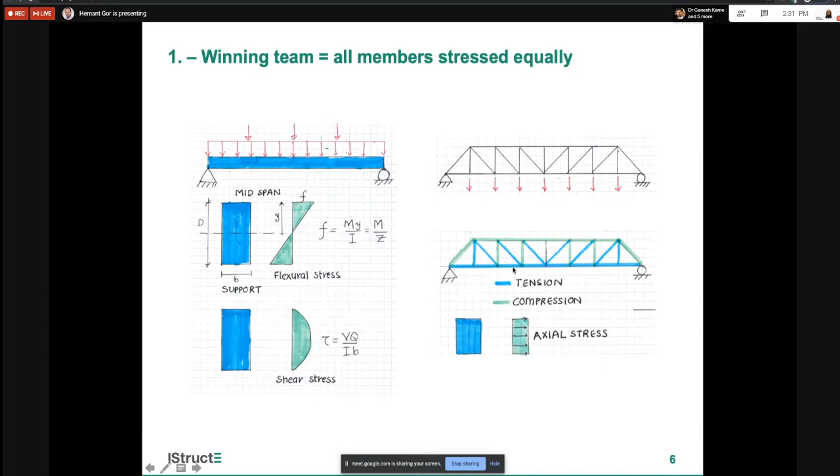Same way, engineers have developed the truss tube system for tall buildings. If you want to build a 30, 40 story building, we go for a shear wall, coupled shear wall, core wall. But if you want to reach a bigger height, we go for a truss tube, where the forces are transferred through axial compression and tension.

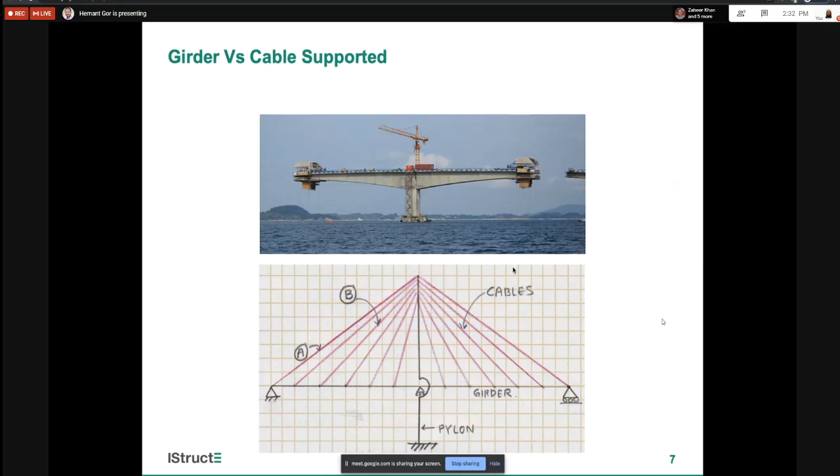So this is the first principle. When you want to make a winning team, all members should be stressed equally. So if your dreams are big, you make a team in which all the members take stress equally. So now we will move to the second principle. Optimized form is where you do minimum work.

In this example, I want to carry a load W to the support. I have a span L, and this load I want to transfer. I have created a truss. The members in blue color are in tension, and the members in green color are under compression. I have a mid-span W load, which I want to carry to the support. These two members, which I have highlighted, don't take any force. Sometimes in a truss, we have zero force members.

During the 17th century, early days of engineering, we didn't have branches like civil and mechanical. They were philosophers, Newton, Maxwell. So they wrote certain philosophy. During that time, Maxwell wrote a theory where he said, when you have a truss, you do the sum of force in a tension member into tension member length. So here we have 5 members under tension and 5 members under compression. So you bring together tension members and compression members, you do the summation, and if that sum, which we call work done, comes less, that structure is the most economical.

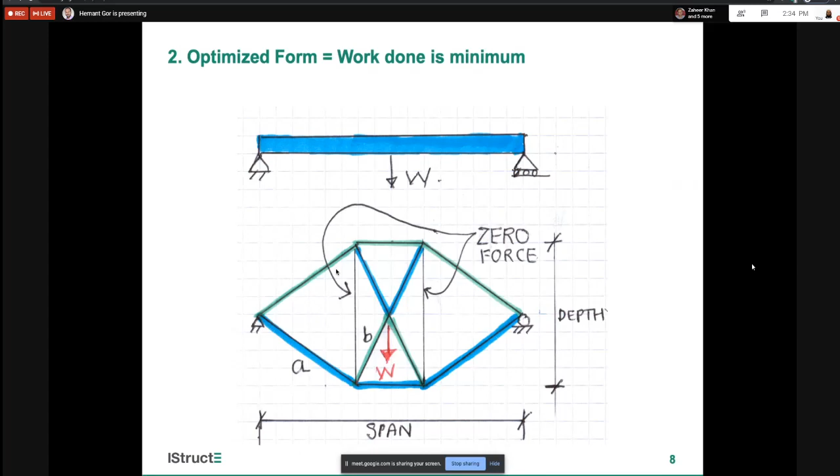I wanted to verify. As civil engineers, I believe we should have 3 Cs: curiosity, commitment, and continuous lifelong learning. So I took this problem. I kept my span fixed and the depth of the truss fixed. The only thing I could change was the ratio of these two members in blue and green color, which is A over B. I did a few iterations to find out which ratio will do minimum work.

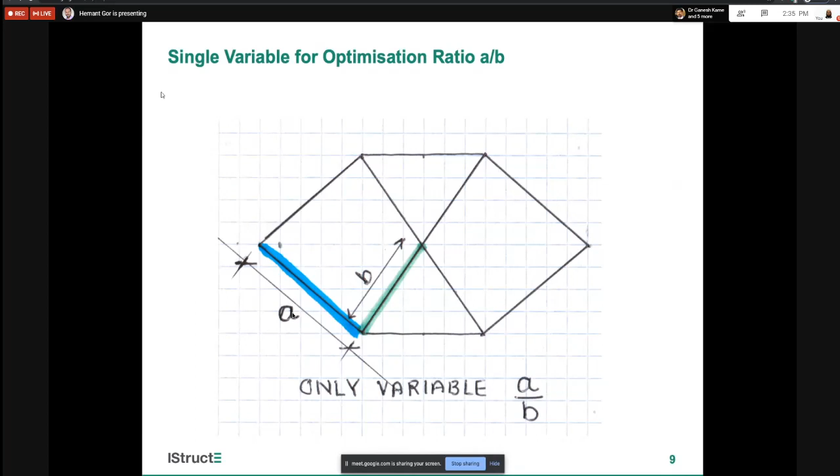This is the second principle. When we create a structure, if it does minimum work, it is the most economical form. So I did analysis in an analysis tool. This is my problem: a span of 4 meters, a lever arm, which is the depth, of 2 meters. 5 members went in compression, 5 members went under tension. And as Maxwell said, if I have a force in member 2, I will multiply it by member 2 length, force into length.

So the members which are in tension, I will bring them together: 2, 4, 11, 7, and 9. I will do the sum. Same way, compression member 1 force into member 1 length, member 6 force into member 6 length. So we have two sums. That structure is amazing. It is optimum.

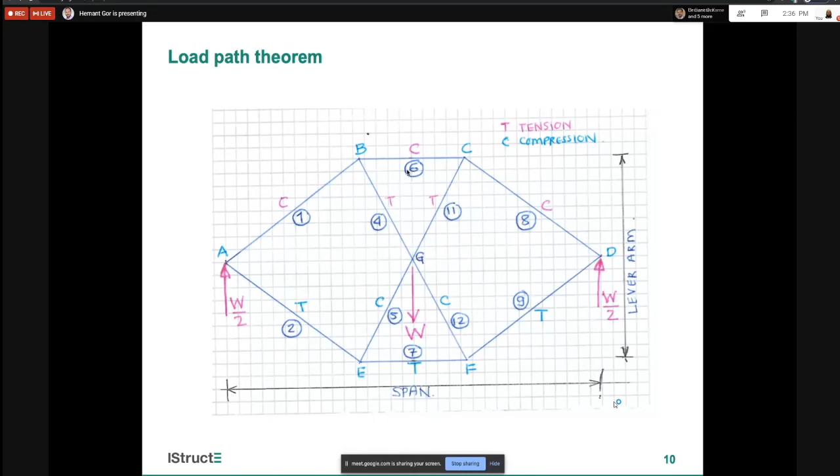So let me share with you the outcome of this research problem. I took 3 trial ratios. First was A over B as 1.543. Second, 1.618. Third, 1.752. And I started noting down the forces in the members and lengths. I applied a 100 kilonewton point load at the center.

Let me share with you the first analysis outcome. So the first analysis we did with the ratio A over B of 1.543. Member 1 length was 1.761. Force in that member, which was under compression, was 44 kilonewtons. And when I multiply 44 with 1.761, the number which comes is 77.545.

I did the same exercise for the remaining 4 members in compression. I found their sum. The sum came to 275.202. The same thing I will do with members in tension. We had 5 members in compression, 5 members in tension. So we did this exercise with the members which were under tension: 2, 7, 4, 11, 9. Their length and forces in them.

So now here, since in some software they show tension as negative and compression as positive, the sign is not important now, because we have accumulated all the tension members together and compression members together. So now we found the force into length sum, again 275.

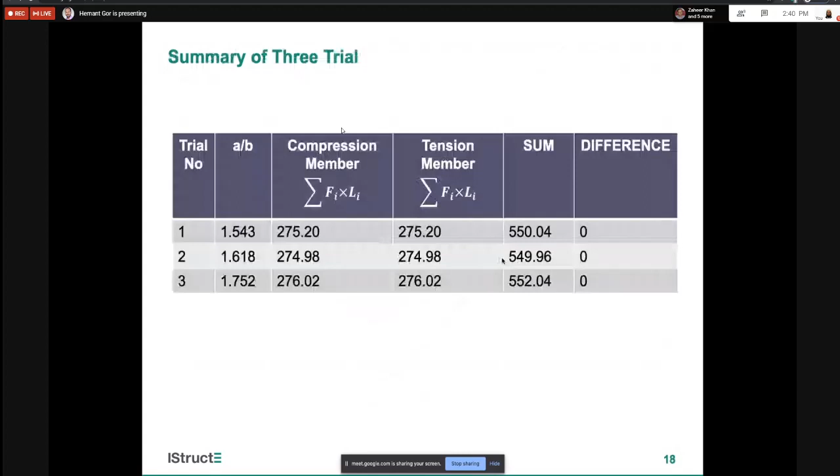We learned in our first year computer science course. The computer teacher told us to write an algorithm which gives us a Fibonacci series, which is 1, 1, 2, 3, 2 plus 3 is 5, 5 plus 3 is 8. So when you continue this Fibonacci series, the ratio of 2 adjacent numbers, bigger number over smaller number, comes to 1.618, 1.618.

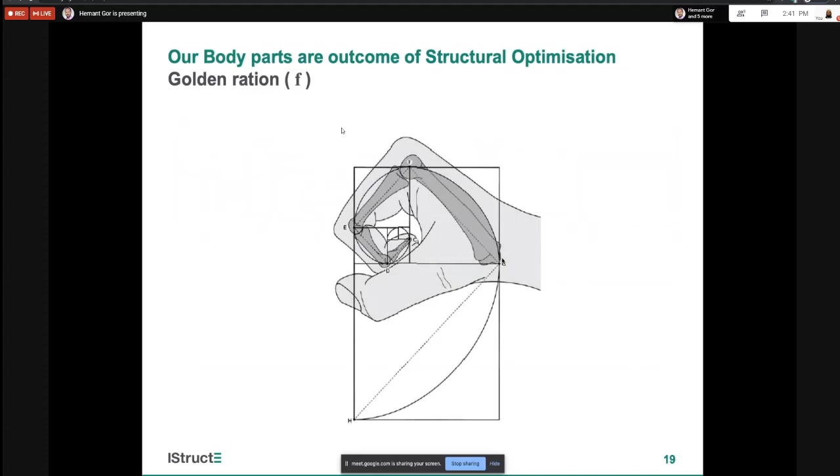And the structural engineer who created our body: when you look at your fingers and try to bend them in this shape, the ratio of this length over this comes to 1.618. This over this, 1.618. So this means the one who created our body was a true structural engineer. He wanted us to do minimum work.

Now you will be curious to know how we can apply this knowledge in our structural engineering. Bill Baker, who designed the tallest building, utilized this angle for his bracing, because when you create a truss with a bracing angle which gives the golden ratio, it will do minimum work. Many structural engineers, I want to tell you that you always can connect mathematics with structural engineering. If you create a structure which is beautiful and elegant, it will be economical, it will be optimum.

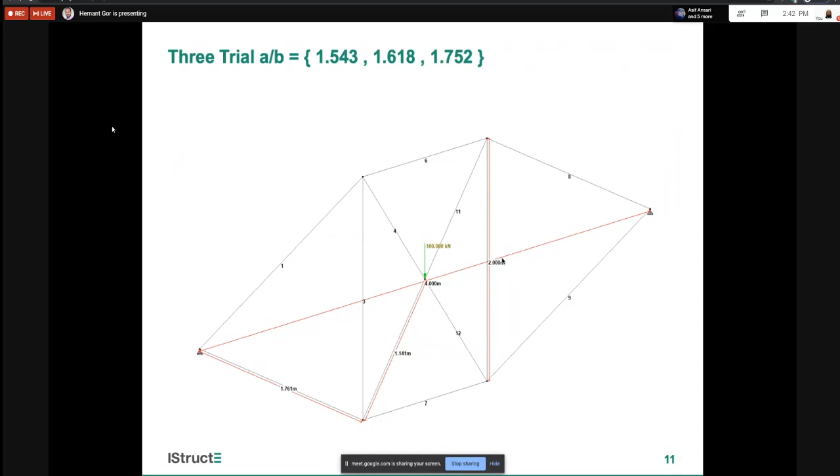So when you come to industry tomorrow, connect your learning at university. What we learn at college is 2 to 5%. I remember when we design a foundation, we assume the self weight of the foundation is 5 to 10%. So what we learn at university is 5%, 2%, but it is the foundation which will make us a true engineer. So keep whatever we learn at university, different subjects; it will be a foundation for our future.

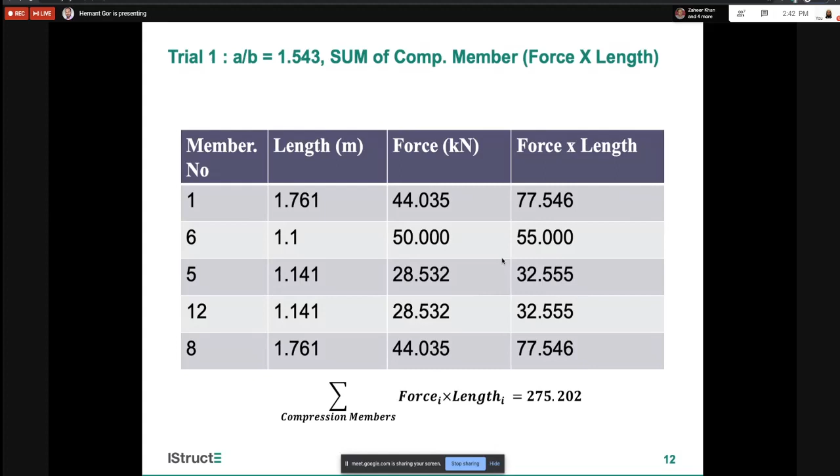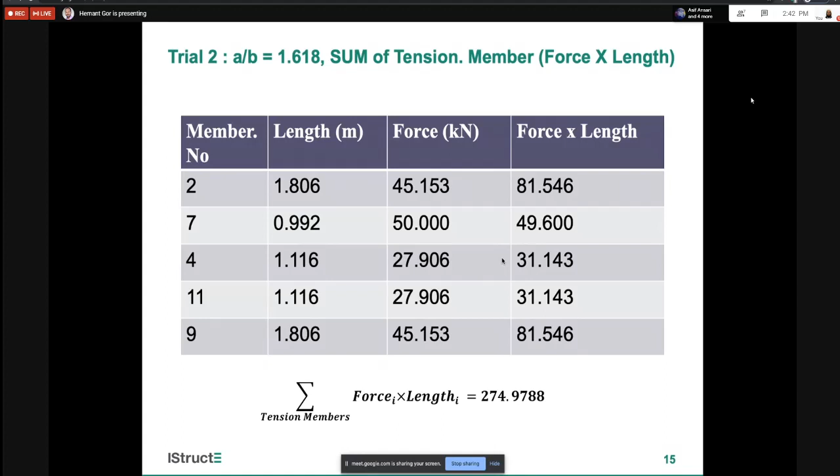And the structural engineer who created our body, the complete body parts, if you see, has 1.618 in our body. And as structural engineers, we can connect the significance of 1.618 with work done. Now, I will present a slide which will show you how Maxwell developed this theory; fourth year students will remember this equation.

Work done in a truss is F squared L over 2AE, where F is the force in a member, L the length of the member, A the cross-section area, and E Young's modulus. If we rearrange, we make F over A times F. So F over A is the stress in the member. So if you stress all the members to the same level, stress divided by E, a material property, becomes a constant. So we can find F into length, and that will be constant. So this can be proved through our learning of work done in a truss. So that was my second principle of the shortest load path theorem.

So when you get an assignment and want to come up with the optimum solution for a truss, you make alternative schemes. Now you will be asking me, here you didn't consider slenderness ratio or net area, because when we design a truss, compression capacity is governed by the slenderness ratio, L over R, and tension by net area. So first, this gives you the form of a structure which will be most economical, which doesn't require area or modulus of elasticity at the beginning.

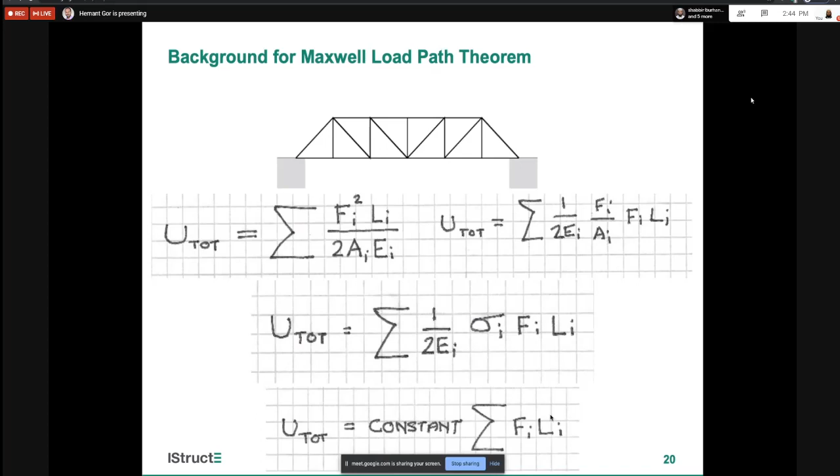Now I will jump into the third stage. Design projects have 3 stages. The first stage is concept design, which we call CD.

Second, preliminary design, where the objective is to size beam, column, foundation, and lateral load resisting system, and develop drawings which we can float for a tender, and contractors can come forward for their bid. So the preliminary design stage is where you broadly finalize your bill of quantities, material, MTO.

Once the contract is awarded, the contractor needs detailed engineering drawings through which he can perform execution, to build the complete structure. That stage we call detailed design. In oil and gas industry, the preliminary design is called front end engineering design, FEED. So these are the 3 stages for design of a project.

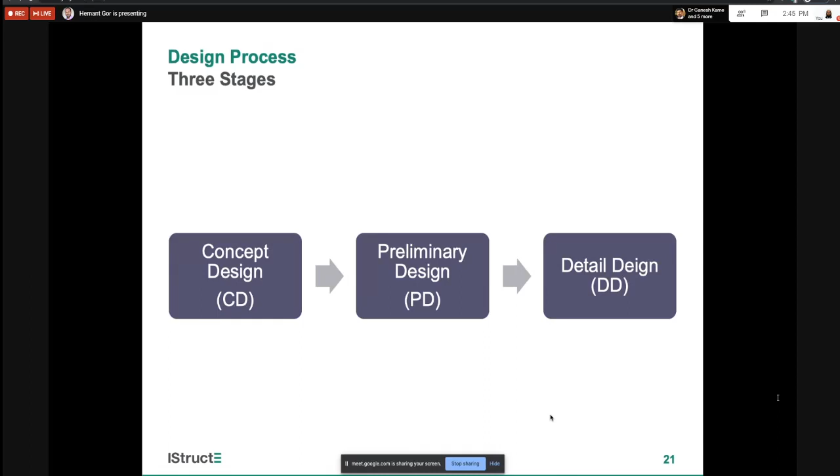The design process flow chart explains this. The first step is to understand the problem. Like we want to build a bridge for a given span, what are the site constraints? If you want to create an industrial shed, what is the height, span? Then we finalize the structural form - do we want to go ahead with a truss or a cable supported structure, different structural forms.

Then the second step is initial sizing of elements - beam, column, bracing members. Once we have geometry and initial sizes of a member, we put this information in a 2D or 3D simulation software, apply load, boundary conditions and constraints. Once we receive computer simulation results, should we trust whatever the computer gives?

No, we should verify our results with hand calculation. We should check does action and reaction match. If you have applied a gravity load, then summation of horizontal forces should come to 0. This type of check gives us confidence that we have equilibrium, which we call Newton's third law. We check the deflected shape, and by simple hand calculation we can calculate bending moment, shear, tension or compression forces in a member.

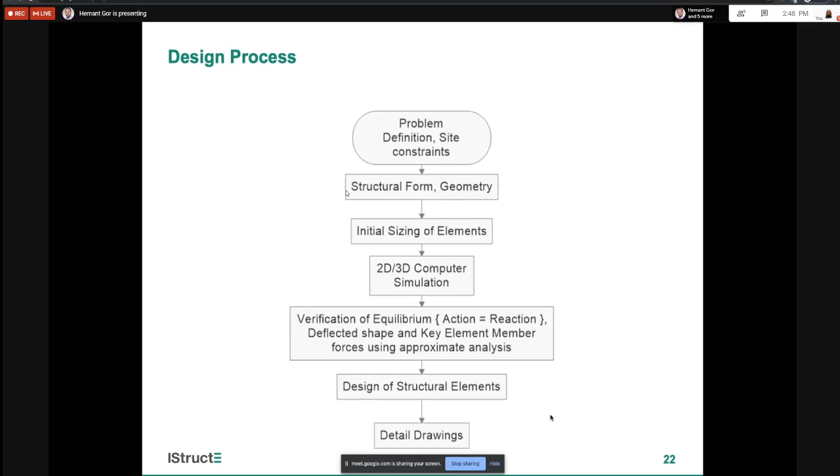Structural design is about 3S: strength, serviceability, and stability. With strength, I mean the members provided should be strong enough to resist the actual forces, so we check the utility ratio. Members can go in flexure and shear, torsion, combined axial flexure and shear, and combined flexure, torsion and shear.

Combined flexure, torsion and shear will come in a tank, where we have a ring beam supporting a tank. So we must understand how the action is getting transferred to the foundation.

The second check is serviceability. Our deflection should be within acceptable limits, because we may be putting some brittle material on a beam, and if it deflects more than allowable, that brittle material will crack or get damaged. So the serviceability check - crack width we perform for water retaining structures, to ensure water tightness.

Sway - like in a tall building, we have height over constant to be checked for sway requirement. Vibration - if there is human movement on a bridge or a floor and the frequency of our leg movement matches with the structural movement, then we will have a phenomena which we call resonance.

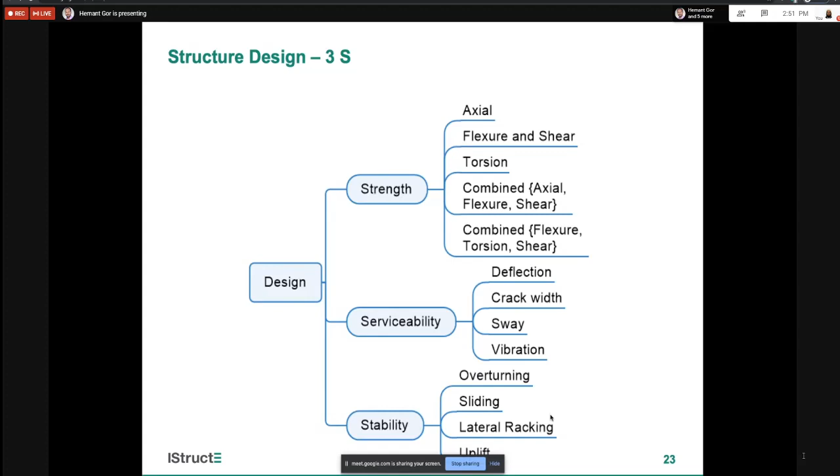How do we provide lateral stability in a building? Lateral stability in a building can be provided by three forms.

So to provide lateral stability in a building or industrial structure, we depend on a braced bay, a moment or portal frame, or a shear wall.

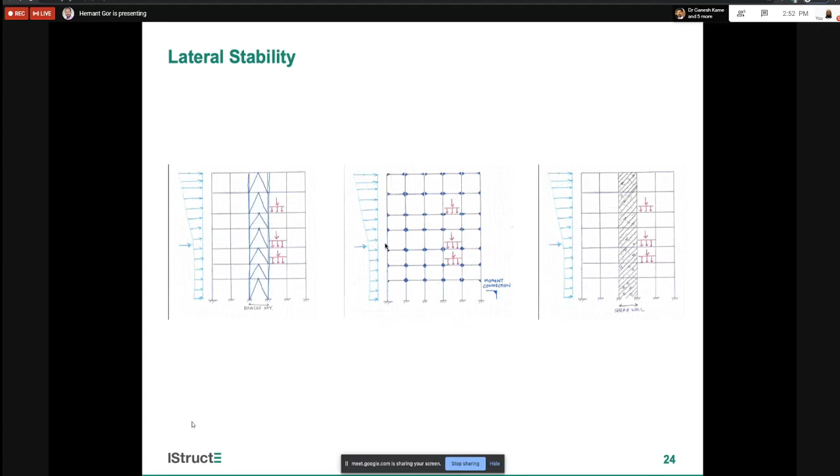Now I will take you to the steel design rules of thumb. The steel profiles available around the world are European, British, American, Indian, and Japanese sections.

European sections for beams: when we think of a beam, it is shaped like an I. The European sections are IPE, AA, A without any acronym, O, and V, followed by the depth of the section. So if I have IPE A 200, the 200 denotes its depth. I've arranged these sections in increasing order of weight, so IPE AA is the lightest section and IPE V is the heaviest.

British sections are called universal beam, or UB, followed by depth and weight of that section. American sections are called W, followed by depth and weight, with depth in inches and weight in pounds per foot.

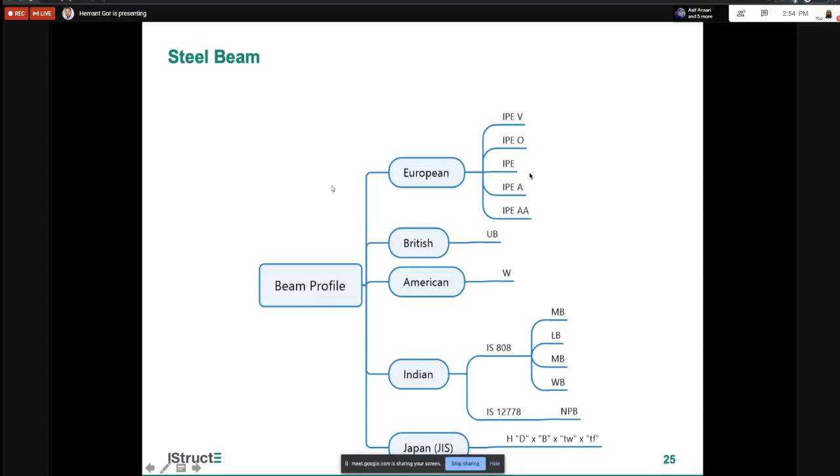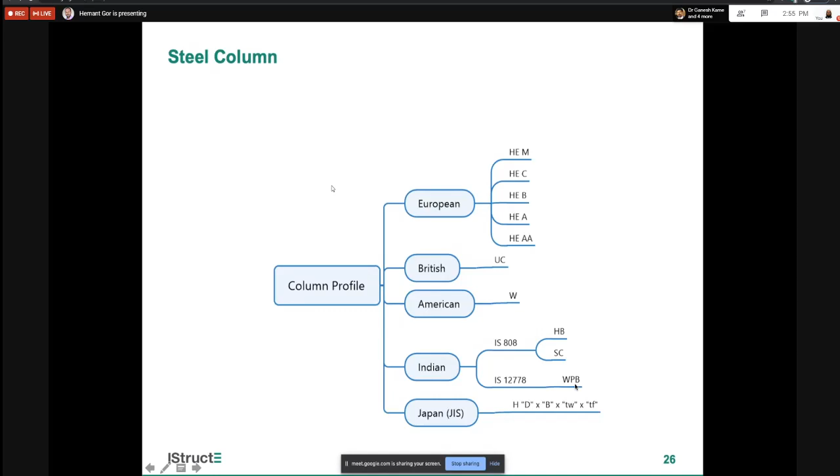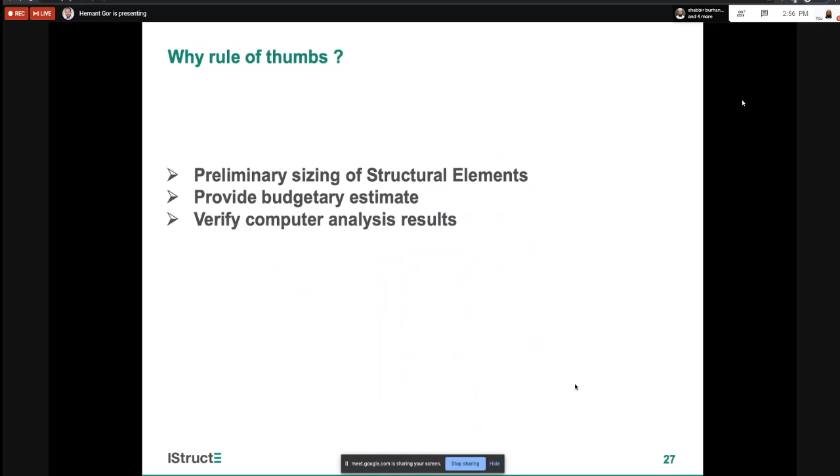The first thumb rule I want to bring is that flexural members are governed by deflection, and deflection requires moment of inertia. So the first thing required for deflection is the moment of inertia of a profile.

If I have selected the depth of a beam based on span over depth ratio, in RCC we use 7, 20, 26. So once you've decided the depth of a steel beam, for a simply supported beam in steel, you can go with 22 or 23, giving you D.

I want to find out its moment of inertia. If you want to find it quickly without looking into the steel table, it will be approximately D squared into the weight of that profile, over 4.7.

Now, how do you remember 4.7? We got freedom in 1947, so 4.7 is easy to remember. You put depth in centimeters and weight in kg per meter into this formula, and you get the moment of inertia in cm to the power 4.

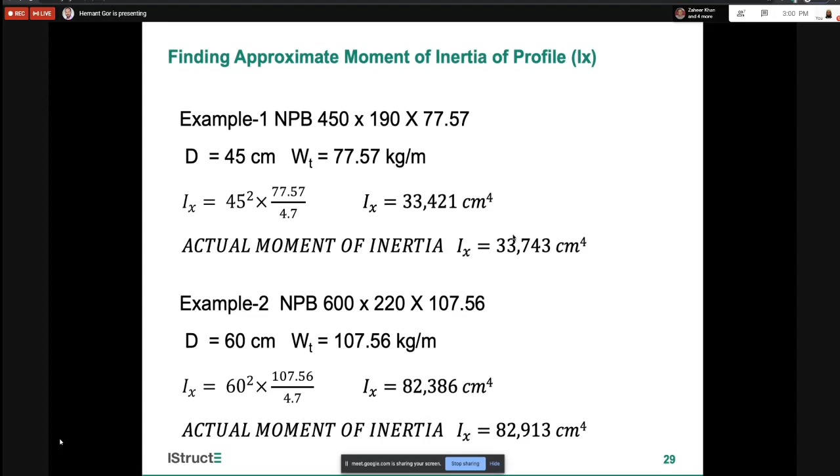So this was a formula which connects moment of inertia with depth and weight of the section. Now, can we develop a similar relationship for wide flange parallel beam? Yes. In wide flange parallel beam, it comes d square weight over 4.4.

One more thing I would like to tell: moment of inertia which we learn in first year engineering mechanics, it is when we want to, like in I section, area is concentrated in flanges. So if I know area of flange into this distance, this area into distance square, I bring this also to the neutral axis, so area into distance square will give transfer moment of inertia.

So this formula we can verify, because what happens in I-beam, the load is taken by flanges in flexure. If we have a simply supported beam, top flange goes under compression and bottom flange under tension, and we have a lever arm which acts between them to take that moment. So always moment equals force into lever arm. So curious students can verify and come up with the background of this equation.

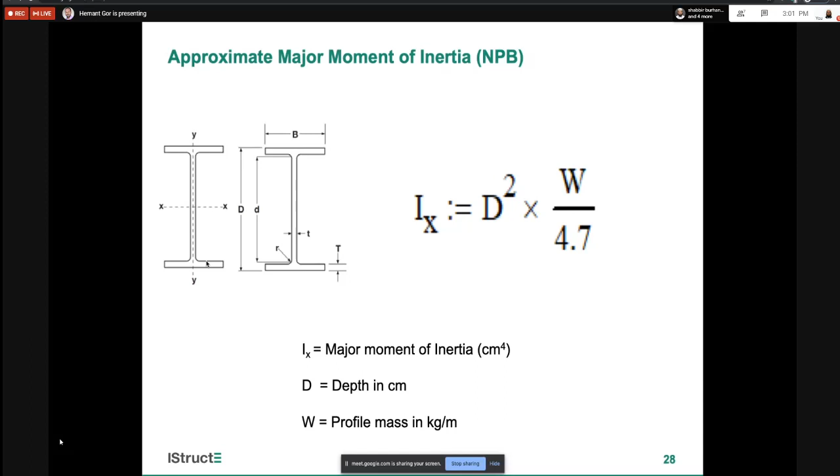For H section, the formula becomes, because H section... we will verify our formula by taking one WPB beam, which is 200 depth, 200 width, and weight 61.29 kg over meter.

Depth square into weight over 4.4. So approximate major moment of inertia is 5,572. If we see the steel table or IS 12778, the moment of inertia is 5,696. We are very close. Another example, WPB 300 by 300 into 100 kg per meter. We are very close with the steel table.

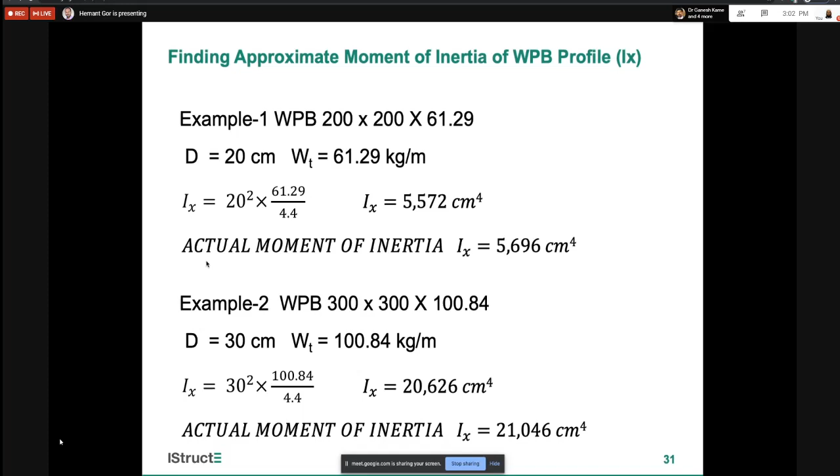So here we learned how we can connect moment of inertia with the depth of a section and weight in kg over meter. The second thing which is used in steel design, in a truss, is we have to check slenderness ratio.

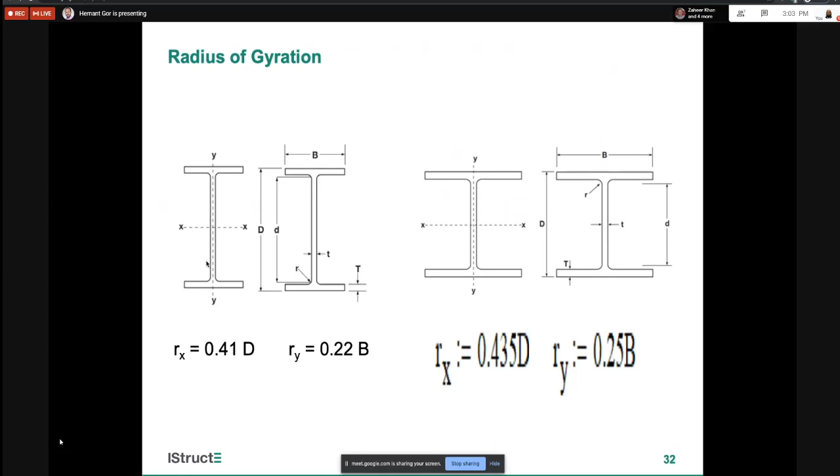Slenderness ratio, we learned, is effective length over radius of gyration. So for I section, approximate radius of gyration will be 41% of depth, or 0.41 d, and radius of gyration about minor axis will be 22% of b, or 0.22 b. For H section or WPB, we have major radius of gyration 0.435 d and minor radius of gyration 0.25 b.

Now we will jump into a selection for a beam based on working moment.

Till now, if you have any questions, our faculties have floated a form for the questions. Zaheer sir? Hello? Hello, Zaheer sir? Yes, sir, I am here, sir. Sharing their questions also, if they have. Yes, sir, so we will move forward with our presentation.

So we have seen how we can come up with a major moment of inertia, radius of gyration. The third, and most important thing in steel design, is the deflection criteria.

If we know the working moment M at midspan, the span of a beam, and the initial estimate for a depth, the weight will be 85 ML over depth square. This relationship is developed for deflection criteria of span over 360.

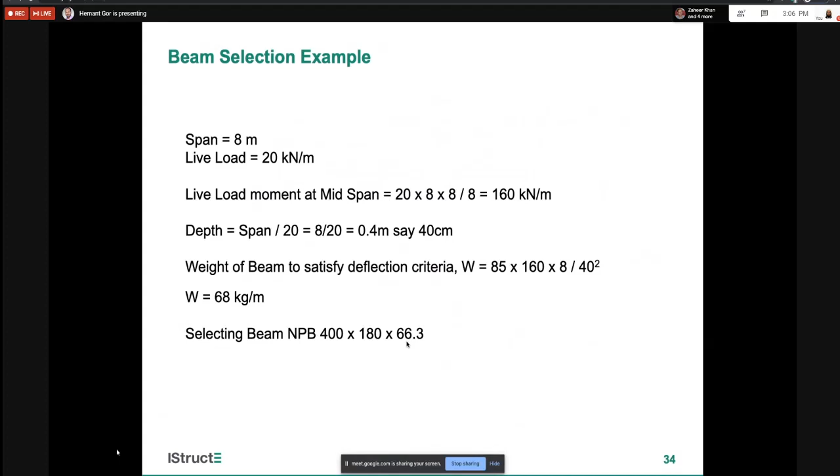Now you may be having a question: okay, if we have a crane supporting beam which requires a deflection criteria of span over deflection as 500, we have to just magnify this formula by 500 over 360. So you can find out for different deflection criteria.

This one is for span over deflection as 360. So if you have a crane supporting beam, you can modify this formula for other deflection criteria. So weight of a beam is 85 ML over d square. 85 into moment, which will be a working moment for which you want to satisfy deflection criteria. It will not be a limit state combination moment. This will be the moment for which you want to satisfy deflection criteria, working moment, into span over d square.

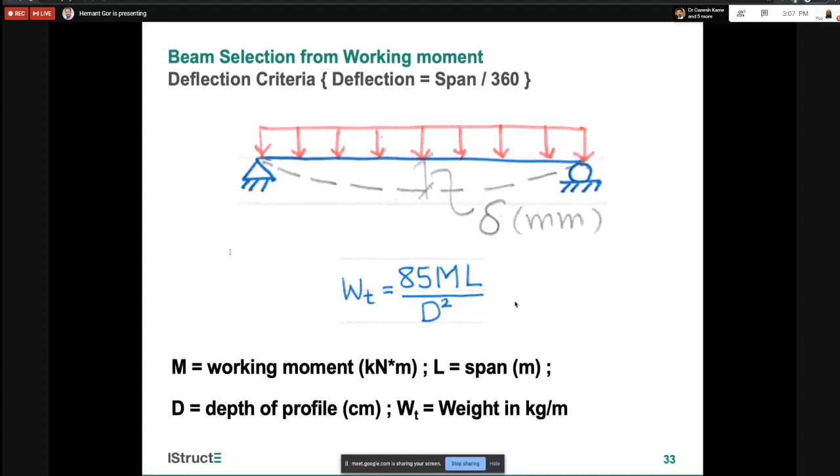Now we will see, from strength criteria, if you want to find out the weight of a section which will be required to take the flexural stresses developed in compression and tension, then weight of a section will be 14 M over d. And for high strength steel, which is 355 MPa yield strength, it will require a lighter girder, 11 M over d.

We have made one assumption in this formula. We are considering the compression flange is fully restrained. Steel is good in tension, but when compression comes, it buckles. And always in a beam, the governing criteria will be deflection and unrestrained compression flange length. So in this formula, we have considered the compression flange is fully restrained.

And a truss is like a cricket team where all 11 players contribute. All are stressed to the same level, having 5 bowlers, all 10 as all-rounders, and the one who is behind the wicket inspires everyone. For truss, we require 17 M over d, and for high-strength steel, 355, 14 M over d. So M will be a moment; here also a working moment we have considered.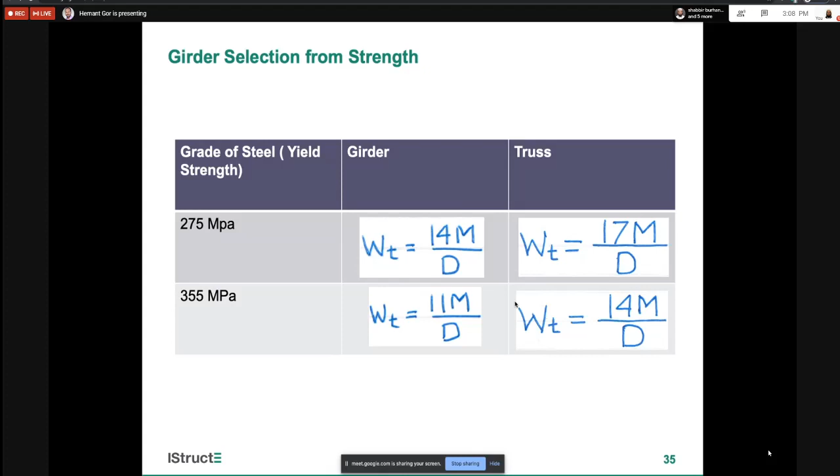Now, we will jump into the formula to quickly calculate deflection of a beam. For uniformly distributed load, we know the deflection formula, 5WL raised to 4 over 384 EI. And if you have a single point load, there are so many formulas. When you enter into engineering, do you want to remember all the formulas? No, just if you have some magic formula which will give deflection for all types of beams. Very close. It will not be accurate, but it will be close to the result. That magic formula is ML square over 10 EI.

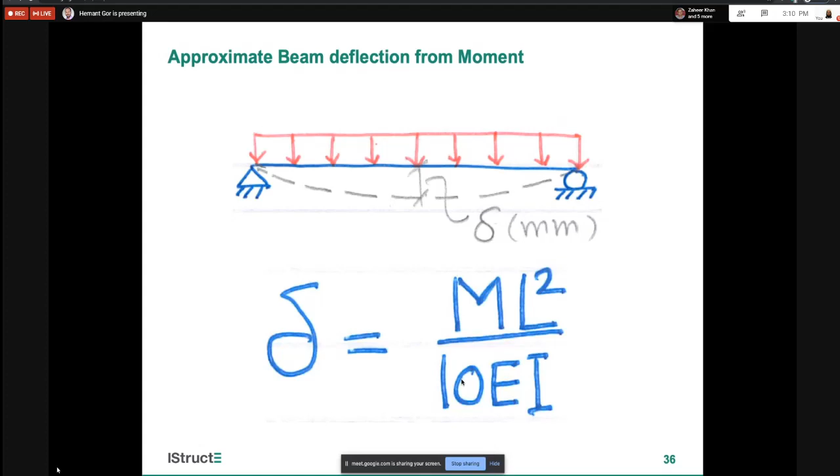Now you don't have to worry about a point load deflection, which is WL cube over 48 EI, or a 2-point load, 3-point load, 4-point load, or a continuous beam. You just calculate the moment at midspan, the span of the beam, and flexural rigidity, E into I, and your deflection becomes ML square over 10 EI. You can verify this formula: for a simply supported beam, moment will be WL square over 8, and finally we get close to 5WL raised to 4 over 384 EI. So the magical single formula for getting deflection is ML square over 10 EI.

For industrial structures, how we build, we can have 3 systems. We call it a post and beam system, where our columns are fixed at base and beams simply supported, a fixed base system, and a pin based frame system, where our base is pin connected. This will be a fixed connection. And if you want to span longer, if your spans are big, then we just convert our beams and columns into a lattice truss. So we make a truss frame or truss structure.

If your span is in the range of 12 to 20 meters, we go for a box section, I section or H section. But if your spans are big, we can make lattice girder structures. And IS code has a special publication. If I remember, it is SP 47, which gives tables for design of lattice members.

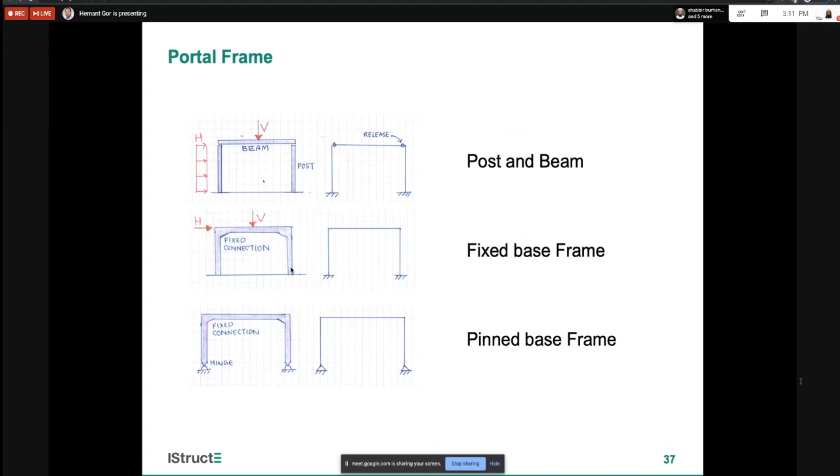As I said, structural design has 3 S's: strength, serviceability, and stability. We covered one more criterion which came under serviceability. It was vibration. I said we should not create resonance in a structure. So we have to make sure the frequency of the force which is acting and the structure frequency do not match. Each individual has our own nature. We are rigid or flexible. Same way, a structure, based on its stiffness, its frequency will decide whether it is rigid or flexible.

So if you want to quickly calculate the frequency of this beam, you apply your working load and find out the deflection. And frequency will be 18 over square root of delta. Delta will be in mm. You can quickly find out the frequency of your beam.

So this will be useful when you are making a floor where people are walking or dancing. Normal human walking frequency is 3 to 5 hertz, so we have to make sure our structure frequency does not fall into this frequency. You may have heard about the Millennium Bridge in the UK, where they had a problem with this resonance, and they provided damping to kill that problem. So frequency calculation plays a big role.

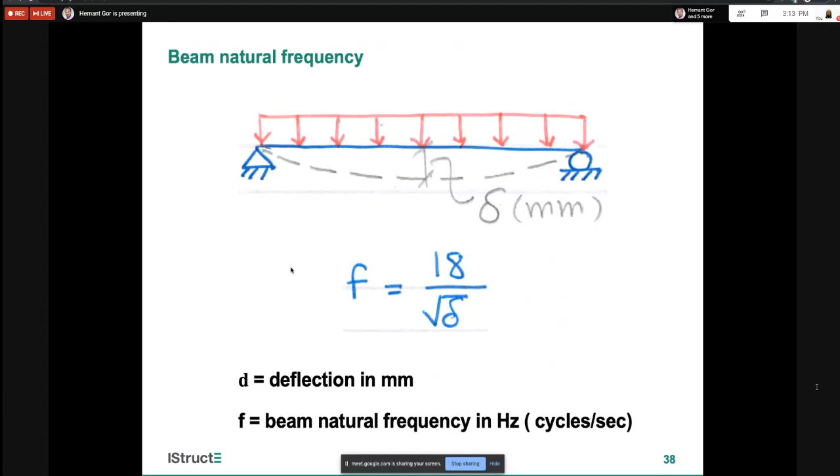Now we will see different RCC buildings. The first step in a design is to decide what will be our floor system, because the floor contributes around 60 to 70% of the weight in a building. As we said before, if our foundation is strong, we can become a good engineer. Same way, when we start building design, the first step is to make an economical floor system. The floors we can make one way or two way.

For one way, we have this many options. Solid slab and beam, flat slab with band beam, like in a mall or office where there is a depth restriction. We want to minimize the curtain wall glass facade, we want to minimize the total height of the building. Then we go for band beams.

Ribbed slab: solid slab will be useful up to 4 to 6 meters, but if your span is big, then we go for a ribbed slab. It works similar to an I-beam. In UAE, Gulf countries, we call it a Hourdi slab. You get ready-made Hourdi blocks in the market, which create voids in between two ribs.

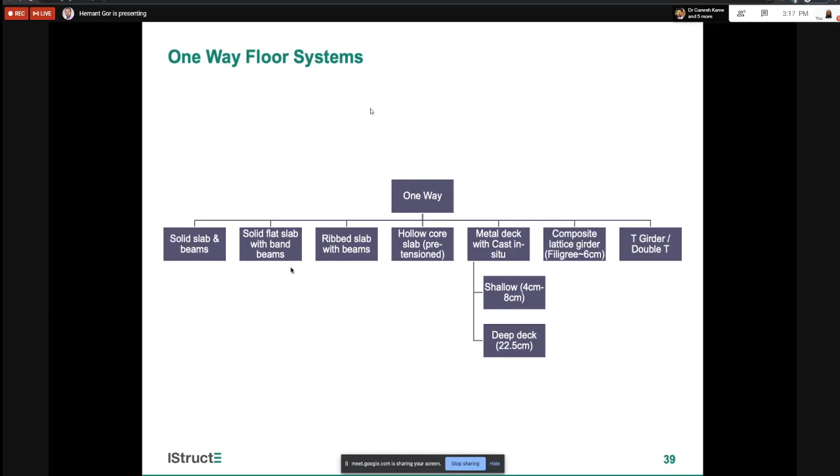Now we will see the different solutions available for two-way slab. Beam and slab system, which we use generally for 6 to 7 meters. When our Ly/Lx is less than 1.75 to 2, we call it a two-way slab. Flat slab with or without drop panel, and sometimes we provide a column head to kill the problem of punching shear.

And when we build a hotel or big auditorium, we go for a waffle slab, where the column spacing can be made 12 to 14 meters. In a ribbed slab, the ribs are provided in one direction. In waffle slabs, they are in either direction.

And nowadays there is a solution we call bubble slab, where we put thermocol circular bubbles inside to reduce the weight of the slab, because the weight very close to the neutral axis doesn't play a role in flexure. The bridge opposite CST station is a voided slab; the first 2-3 spans are voided slab. So voided slabs are very common in bridges also. So these are the 4 solutions for two-way slab.

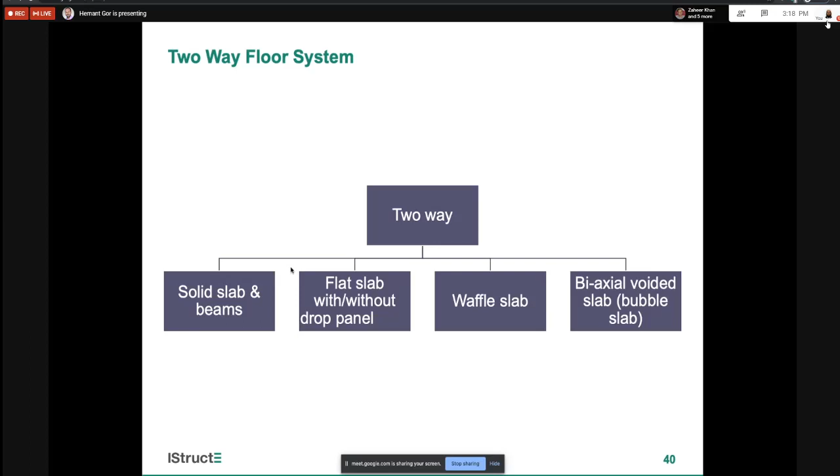Now, once our superstructure is ready, what are the different solutions available to transfer that load down to earth?

If we have good soil strata at ground level, we go for shallow foundation. And if we don't have good soil, we go for deep foundation. In shallow foundation, if you have a good bearing capacity, I will give you a magical formula to quickly find out the bearing capacity of a soil where you don't have a water table close.

The soil report will give the N value, which we call the standard penetration test value. If your N value is 20, then the bearing capacity will be 20 ton per meter square. You can go ahead with your preliminary sizing with 20 ton per meter square. And if your water table is very close, then the bearing capacity becomes half. With N equals 20 and water table at ground level, the bearing capacity will be 10 ton per meter square.

If you have a cohesive soil which has Cu, then the bearing capacity we can take as 2 times Cu. So if my cohesion is 100 kPa, my bearing capacity will be 200 kPa, which will be 20 ton per meter square. So these are the 2 formulas. The SPT value for sand will be equal to your bearing capacity in ton per meter square. So if N value is 30, you can consider bearing capacity approximately 30 ton per meter square, which is 300 kPa.

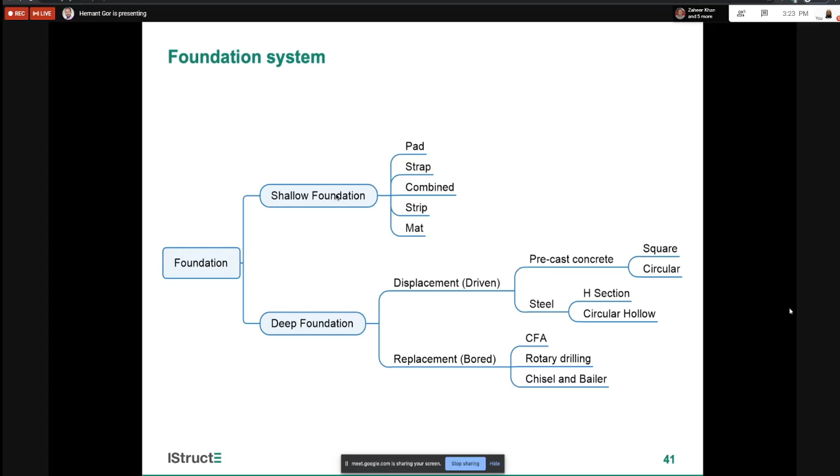Now, as structural engineers, we should connect different subjects together to come up with an innovative solution. His Highness Sheikh Mohammed had a vision for Dubai to build the tallest structure. At that time, the tallest structure was Taipei 101, around 510 meters. So he gave the structural design firm a problem: can you design a tower with a height of 520 meters? And in the 6 to 9 month period when they finalized the design, engineers in China were coming up with taller structures, 600, 700.

So now it was a problem for His Highness. He called the design team and asked, can you make a tower which will be beyond the imagination of other countries? And he said, okay, let us keep the height of the tower secret and start working on this problem. Who is the biggest enemy when we consider a tall structure? The biggest enemy is wind. So as structural engineers, we should understand our enemy.

The design team had a problem. They had to find out how they could kill the wind. You cannot forget wind. Wind will be there. So this is a problem which will be persistent for the complete lifetime.

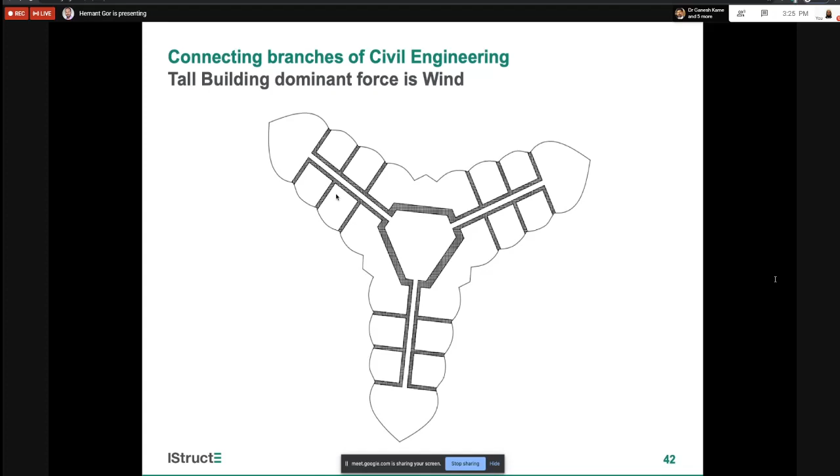So they aligned the Burj Khalifa, one of its noses, along the Dubai runway, because the Dubai runway orientation is known. So when you align, you are creating the lowest resistance. So now the wind is bifurcating and it is creating minimum demand. It doesn't require much demand, and the same structural configuration they were able to utilize.

So when you enter into a real life engineering problem, try to connect all the branches of engineering. It may be transportation, geotech, fluid mechanics. When you connect all the branches with structural engineering, you will always come up with a solution for all the problems.

And the structural engineers used a system with a core at the center, which we call a buttressed core. They gave the name because when we have to retain earth, we use a cantilever retaining wall, and when our retaining height becomes more than 6 to 7 meters, we go for a buttress wall, counterfort retaining wall system, where the load path from the cantilever moves in a transverse direction as one way. So when you connect all the subjects you are learning, the 2% which we do at university, it will help for the remaining 98% of our success.

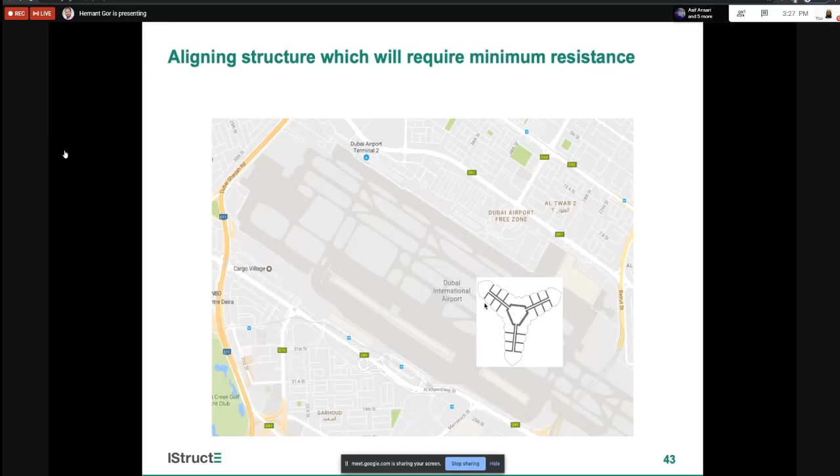Now, I will share one secret with you. We always depend on Google for searching information for our project. When you enter into a real life situation, the one source which you will depend on for all the information is Google. But what happens with Google? See, I'm just asking about durable concrete, durability concrete. It solves our problem within 0.63 seconds. But the trouble is, it gives 65 million results. When you enter into the professional world, we don't have time to go through all the results.

And what happens with Google nowadays? The ones who pay something to them will be in the top search results. So we want to make our search confined. We want to get information from a reliable source. So I don't just depend on Google; I will tell Google to search in leading American universities. Now my results became just 250,000. From 65 million, I came down to thousands.

I know a professor from Stanford University who works in concrete durability. So I went first into all the American universities. I will make my search still more confined. I will put stanford.edu. Boom. My results came from 250,000 to just 1,000. So now I can focus. I have reliable information.

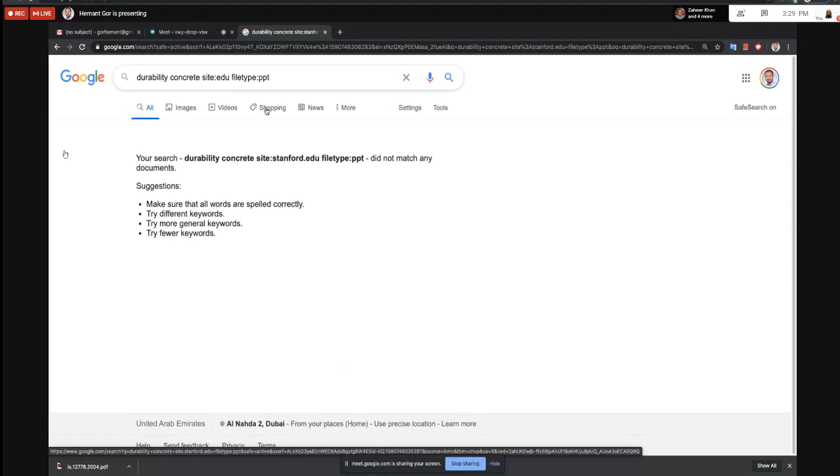We can give clues like file type. I have to make a presentation, so I will give Google a second clue, which is file type. They don't have any presentation available on their university website. So I will change my search. I will see all the universities. So I got 7 results.

So this slide shows how we can make our search smart in Google by giving Google boundary conditions. Like as structural engineers, we give boundary conditions and restraints to our structure. Boundary conditions means supports and restraints, like for a slab, which reduce the analysis equations. So here we are giving Google boundaries where to search. You can tell Google to search in universities, or in the IITB portal, so you put iitb.ac.in.

IIT Kanpur. Sitting in Mumbai, you may want to find some information from Russia. When you search sitting in Mumbai, you will get all concrete durability related information from your neighboring region only. So you can tell Google, please give me information from Russia by typing site:ru, or Japan. If I want to search locally, since I am in UAE, all the UAE websites have an extension. Like we have a surname, Sheikh, Gor, in the same way all websites have a surname.

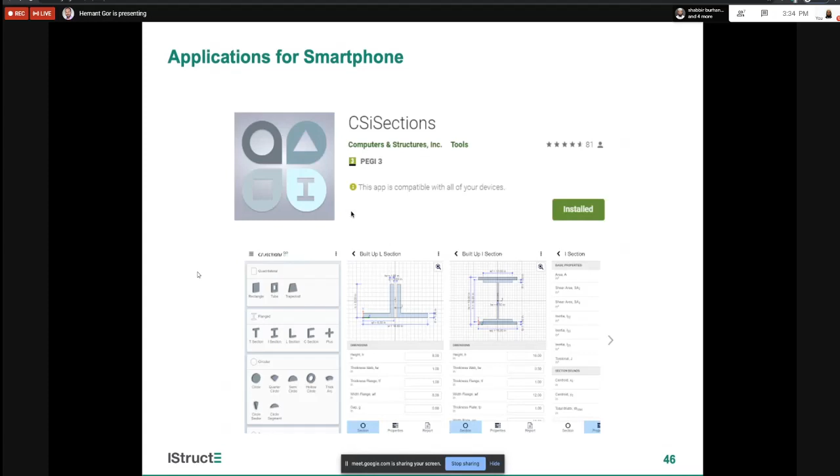With this, I will summarize. We civil engineers do 3C: we collaborate, create, and we are conflict resolvers. By this I mean, when we want to design and build, we have to collaborate with architects, mechanical engineers, electrical engineers, government authorities, or maybe leaders of our country, IAS officers. We create, we make designs which are optimum.

We think about tomorrow. We do sustainable design. We have limited resources. We have limited steel, limited concrete, cement, aggregates. So if we consume all today, what will tomorrow's civil engineers do? Yes, they will innovate new materials, new ideas, but let us make our earth green by making economical structures. And an economical structure doesn't require more, or an aesthetic structure, as we learned in our second principle, the shortest load path theorem.

And we are conflict resolvers. When we work on a challenging assignment and we are close to completion, then a change is required from the client. Like the Dubai tower, Burj Khalifa: it was completely designed, and then they required it to be still bigger.

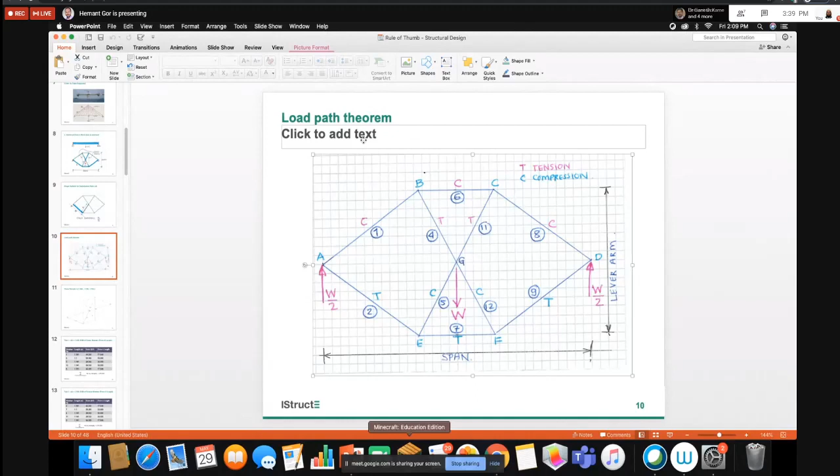Now when we have a real life structure, here we have considered a span. In a real life structure, what will it become? It will turn to 90 degrees. So now what will happen? This will be my bracing angle. So if we keep the bracing angle, it comes around like this - this will be your required bracing angle, not 45 degrees. So I turn my beam into vertical, like in a tower we require a truss in the vertical direction. If we have a bracing system in this direction, it will give us the optimum lateral load resisting system.

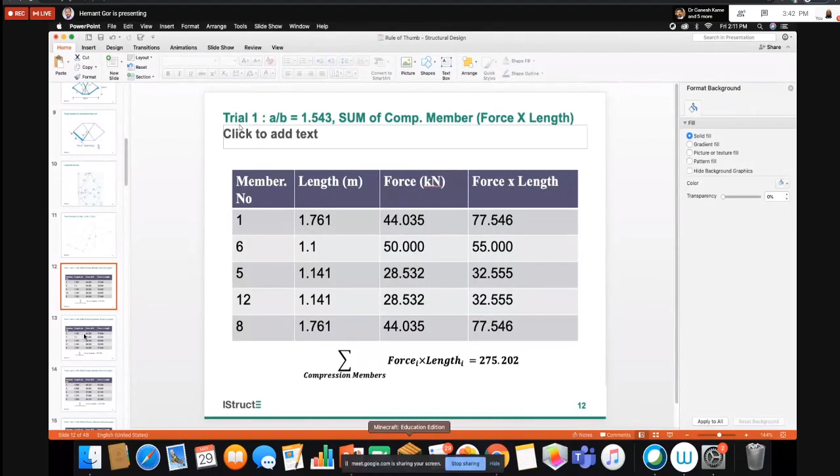I will just summarize our learning today. We learned that when we have a big span, the only reliable system is a truss, where we transfer our forces axially. What happens in flexure and shear? Only extreme fibers are stressed - it's like a cricket team where only two players are working. Then the second principle we learned was about the shortest load path theorem, Maxwell's shortest load path theorem.

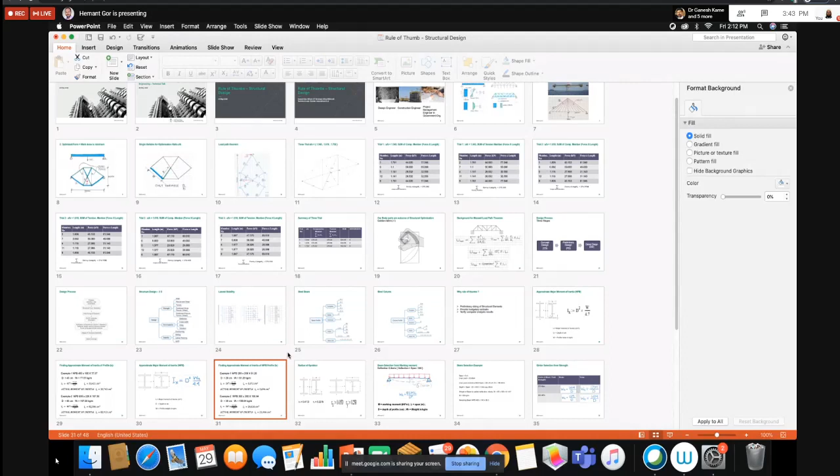Then we learned about the design process - the lateral stability system, how to come up with the major moment of inertia by knowing the weight and depth of the section, the frequency of a structure, the weight of a truss required when you start the job, the deflection formula which is ML square over 10EI, and the weight of a truss, 17M over D.